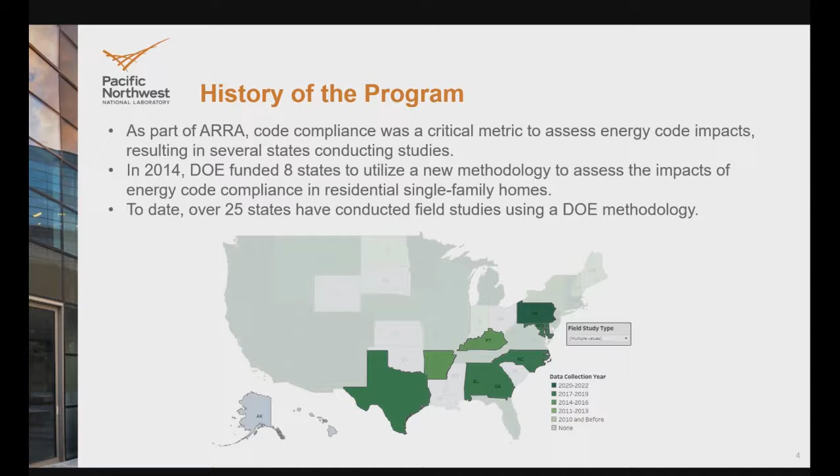And then here are the 8 states that were initially funded as part of that 2014 funding opportunity announcement. That was the 3-part pilot series that really generated additional interest in continuing on with field studies and using them for a number of reasons.

So if you're a state or a local jurisdiction, you may be asking, why should I conduct a field study, whether it be residential, multifamily, or commercial? There are a number of benefits for doing that.

One being just to get a sense of how homes, multifamily buildings, and commercial facilities are being constructed across states. From the single family side of things, which I'll primarily be talking about today, what types of foundations are primarily installed in states across the US, or in your specific state?

How well are homes being tightened up? And if they are being tightened up and have relatively low air leakage rates, do they have mechanical ventilation, and what does that mechanical ventilation look like?

There are a lot of benefits, both from a code compliance standpoint, but also from a utility standpoint in terms of developing programs and really just getting a better understanding of what's going on within a state or a particular jurisdiction. From an energy code standpoint, really the impetus of these studies was to assess rates of non-compliance.

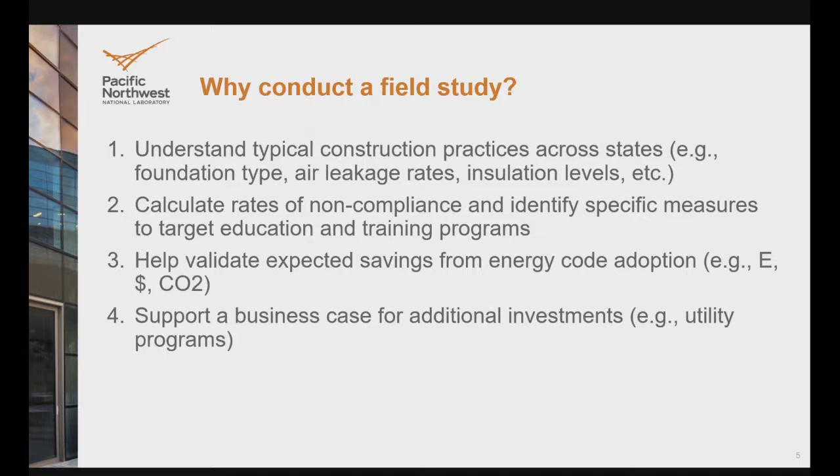And then the last big benefit is utilities are certainly interested in energy code compliance programs and using that to potentially claim savings through an energy code support program. So this can potentially help drive additional investment from utilities in terms of energy code implementation.

So a little bit about the methodology. I won't get too in the weeds here, but I referenced the key measures as being a really important aspect of these studies, and that's because those are really the basis for the methodology, the basis for the potential energy savings that are generated. There were 8 key measures identified in the residential energy code as being the high impact measures, having the biggest impact on energy use in a home.

The list is here: envelope insulation levels, as well as how well that insulation is installed. Field teams looked at both of those aspects, and that determined whether or not that specific measure was being complied with or not. Window efficiency, both U factor and solar heat gain coefficients, envelope air tightness, duct tightness, and high efficacy lighting.

And so the methodology requires that 63 sets of each of these measures be collected. So for one complete data set, it is all 8 of these measures, and we need 63 complete data sets for those, for us to do an analysis at the state level, and for the results from that analysis to be statistically significant and representative of compliance rates across the state.

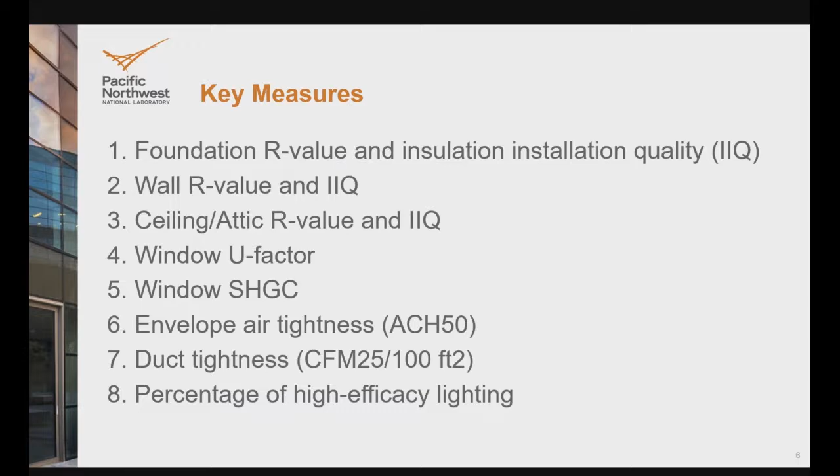Before I jump into the new tool that's been developed, I wanted to provide some initial results from that pilot study, which was really just a proof of concept of this new methodology that DOE and PNNL developed to assess energy code compliance in residential single-family buildings.

There was a 3-phased approach. Phase 1 was the baseline study. Phase 2 was the education and training program. And phase 3 was the post-program assessment to determine whether or not we moved the needle, or the field teams moved the needle, in terms of compliance.

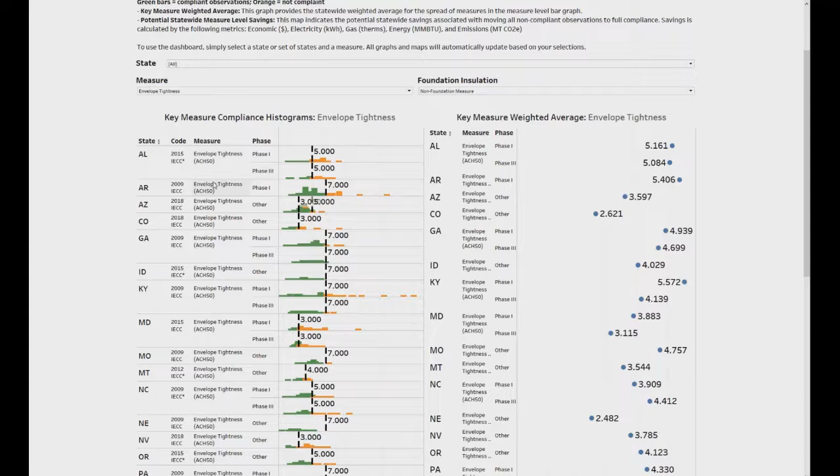The green bars indicate that those observations are compliant, and orange indicates non-compliance, so anything to the left of the line is compliant and anything to the right is non-compliant. You can see the breakdown of data for each state and for each measure. On the right, you can see the weighted average air changes per hour for each state based on the data that was collected. You can see that Alabama made a slight improvement, at least on average, from phase 1 to phase 3 in terms of envelope tightness.

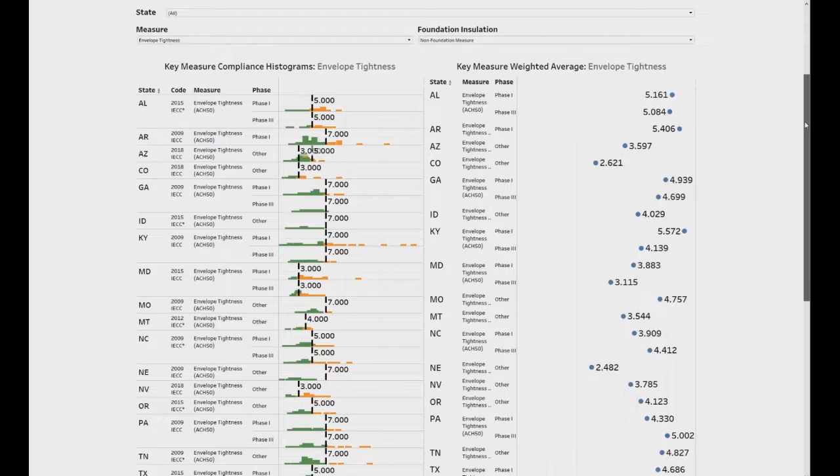Maybe a better example might be Maryland. They were on the 2015 IECC at the time the data was collected, which required 3 air changes per hour. So they went from a 3.8 average to pretty close to the code requirement on average. They made a pretty big jump there.

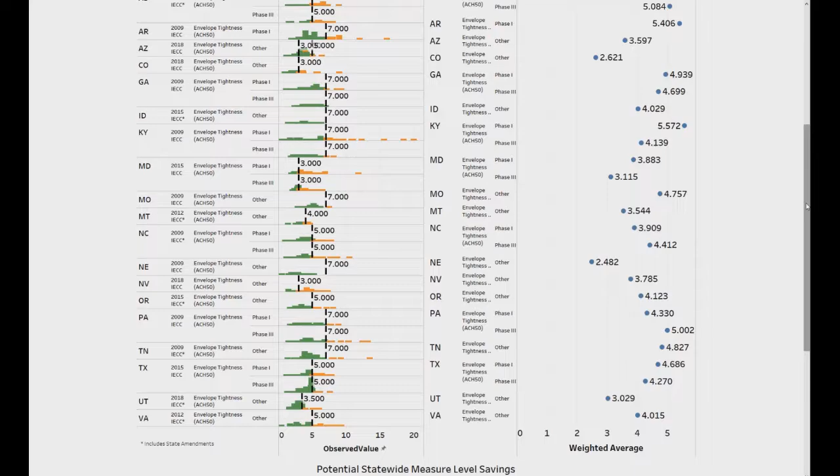Scrolling down, you can look at potential savings by measure in each state. This is economic savings, so dollar savings at the state level, but we also have this information for electricity savings, gas savings, emissions, and energy in MMBTUs. You can filter through those, and you can look at it at a per-home level.

You can also compare states. So if you wanted to look at Southwest states, which are also ones where field studies were recently conducted and finished up - Arizona, Colorado, Nevada, and Utah - you can just compare those states to see how results compare. You can look at different measures.

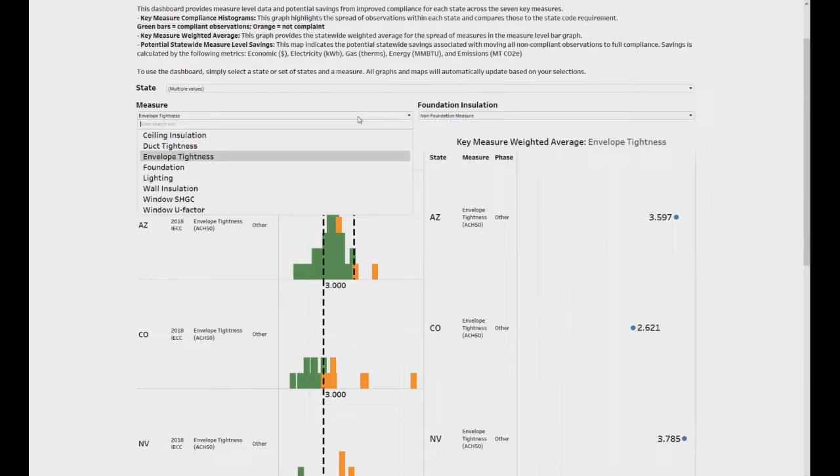So ceiling insulation, for instance - all of the insulation values we provide in U factors. We did collect the R value data, but the reason we provided U factors is because insulation measures require a combination of R value as well as how well that insulation was installed, and that's what determines the U factor. We model these U factors and then compare that against the code required U factor.

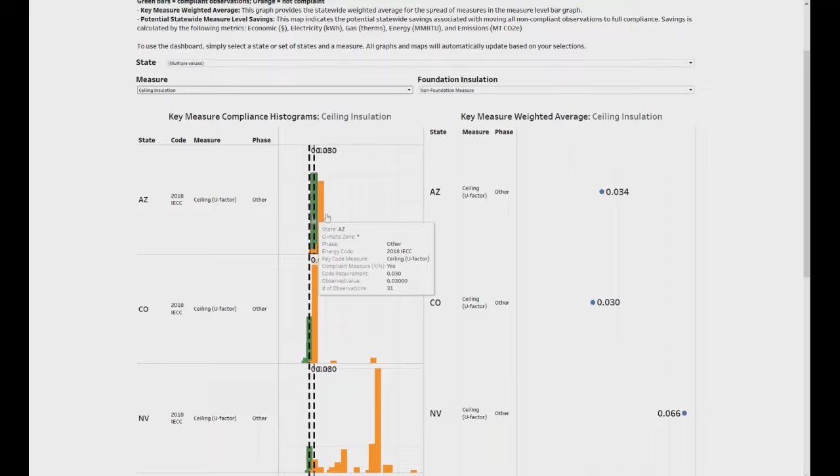Some states have multiple climate zones, so there are multiple requirements, but the colors still represent whether or not the measure or observation was compliant. There's a lot of data on this tab in particular. I think this is a pretty important tab and kind of the crux of the study - it's foundational to it, given that it's a deep dive into the key measures that generate savings for everything else.

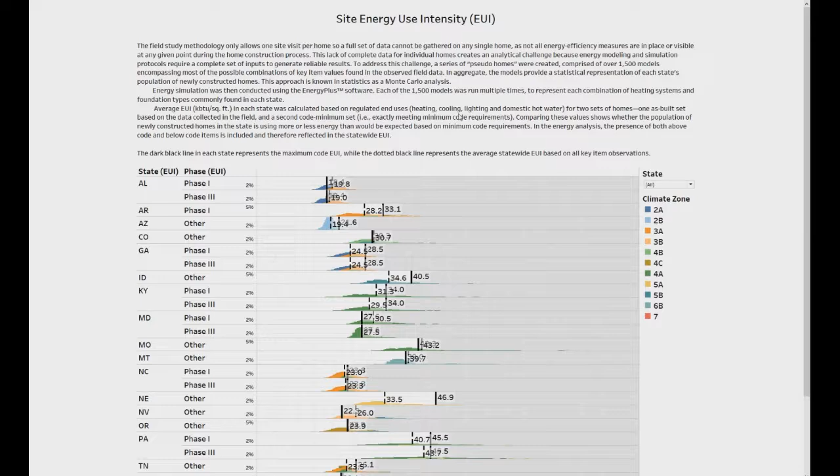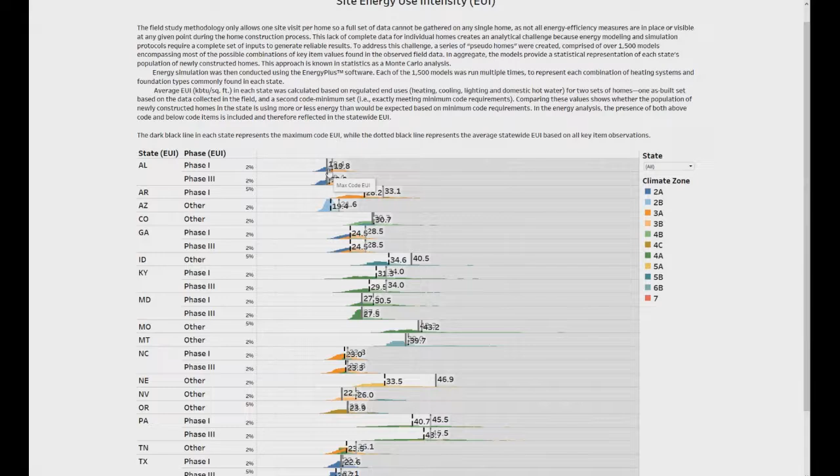Some other tabs - I think I'm running low on time, so I'll try to breeze through these quickly. Average energy use intensity, through a pretty sophisticated modeling approach. We'll just look at one state to make it easy - let's look at Georgia. The dark line is the maximum code EUI, or the EUI required if a home was meeting the prescriptive requirements of the energy code, and the dotted line is the average observed EUI.

So out of all the data that was collected, it provides the average across the state.

We also looked at installation quality, which I referenced. This is a high level across all states. Grade 1 insulation is typically installed per manufacturer's instructions and doesn't have as many voids or gaps, really providing the thermal properties intended from that insulation. Grades 2 or 3 have a lot more gaps and certainly degrade the effectiveness of that insulation. So insulation quality was a big area, and really across all states has been a big area for potential improvement.

But certainly some states more than others, and some measures more than others. Ceiling insulation was typically fairly well installed. And then I'll just reference the last 3 tabs here.

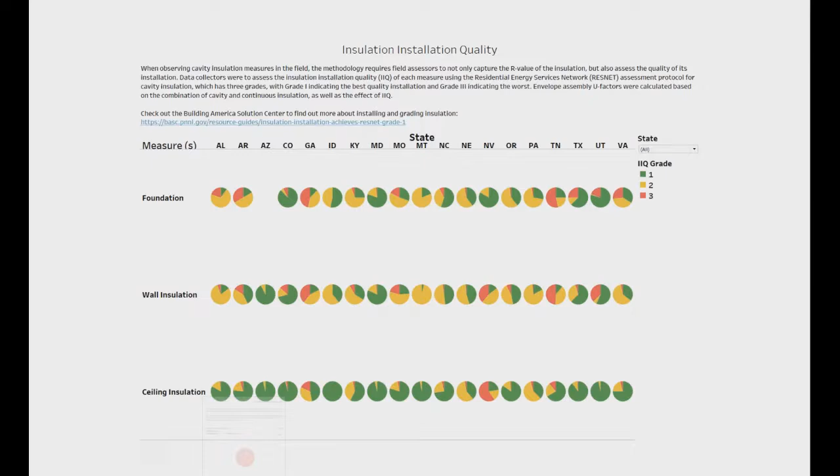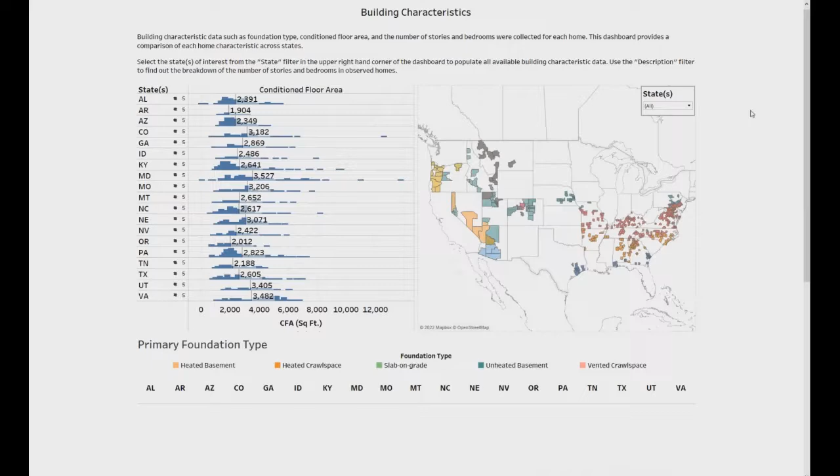So we collected measures on HVAC compliance as well as efficiency levels, so there's data there, plus lots of other compliance measures. The field study and measure analysis is really based on those 8 key measures, but the actual data collection spreadsheet requires that teams collect all sorts of additional compliance measures, and that's all included as well. And then just some general building characteristic information: conditioned floor area, foundation type, number of bedrooms, number of stories.

And so I will end things there. We'll provide a link to the online dashboard at the end of the set of presentations, and certainly would encourage you to take a look, and hopefully you can use this as a resource when you're developing training programs and doing other things. And so I'm going to switch gears and introduce our next speaker.

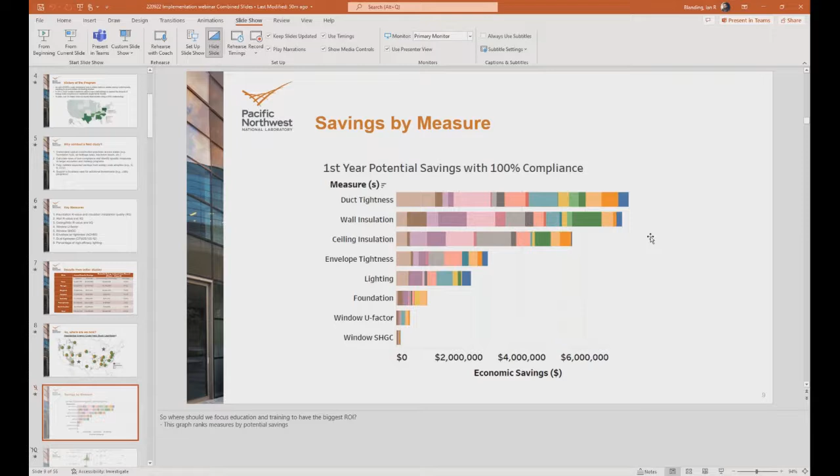So Rob Vieira is the Director of Buildings Research at FSEC. One of the key questions we get, in addition to energy code compliance, through the Department of Energy, is which compliance method are builders or designers choosing to comply with the energy code, whether it's prescriptive, performance, or UA trade-off. So Rob and his team set out to understand and answer some of those questions. They also took it a step further to try to understand whether or not the compliance path you choose impacts overall energy use after the home is built, so impacts operational energy use.

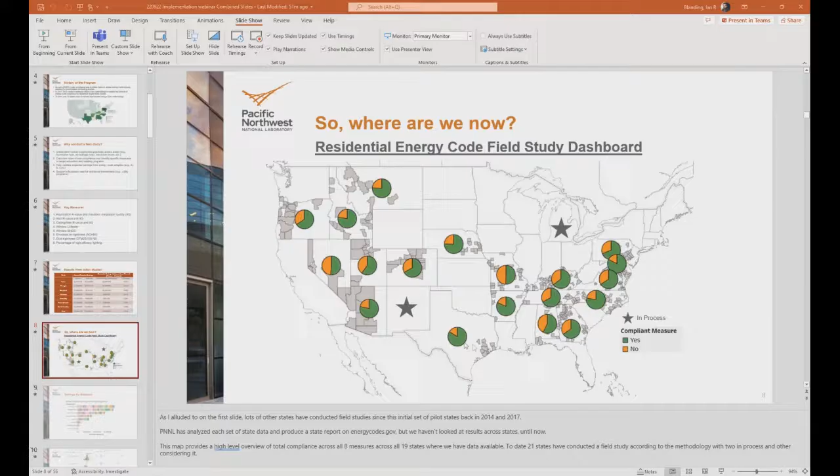And so I will turn things over to Rob at this point, and then we'll learn about the study that him and his team have conducted. So Rob, if you're out there, if you want to take control, and looking forward to hearing your presentation.

Great. Thank you, Ian. Appreciate it.

So as Ian mentioned, we have a project from the Department of Energy. And are you seeing the slide? Yep, all yeah, good, we can see it. I just want to make sure. So we have this project.

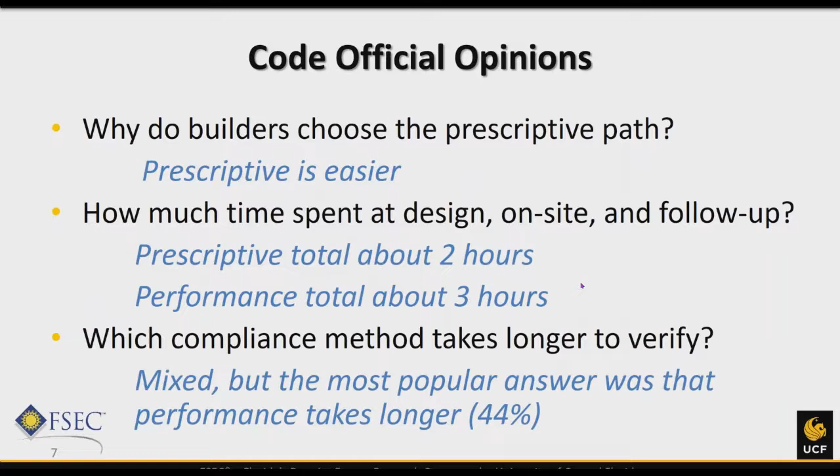We also asked in terms of consistency, what are you having? And in this case, we defined what we called good as meeting all required targets, with fewer errors. Variable was defined as builders are a bit inconsistent, sometimes important items are missed. Or poor, which is defined as builders' compliance with energy code is often incorrect.

And we saw that varied depending on whether you were in a jurisdiction that did mainly performance or prescriptive. Basically what it came up to was not a huge difference here. We had about 8% doing poor for performance, and those doing prescriptive, 9% - no real difference there. The group in the middle that's mixed, we only had 5 respondents in that group because, as we said, that's a pretty small group.

So that gives you sort of an idea - not huge differences along the way, just a little bit more time to do the performance according to the building officials than the prescriptive.

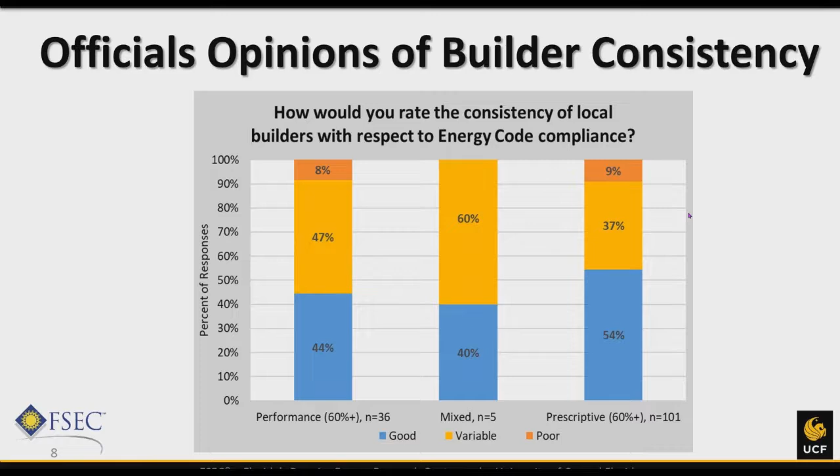So we'll jump into the utility bill comparison, which we did in 2 locations. Both are in climate zone 5 - that's Fort Collins, Colorado, and Iowa.

Because of requirements of the state in Colorado, we had to bin homes into groups of 15 or more. In Iowa, 5 or more. So even when you start with a fairly decent set of data and houses drop out for one reason or another, when you end up doing binning, they end up reducing the ability to do statistical significance - because instead of having 15 or 5 data points, you have 1. And when you bin into 15 or more, keep in mind, if you've got 25 homes of some certain group, that's basically becomes just 1 bin. So it's even more so than that.

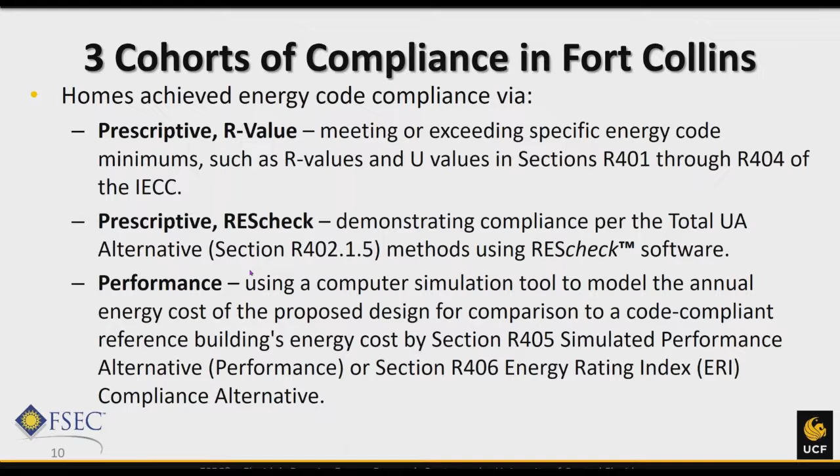In Fort Collins, we had a request to break up the prescriptive into the R-value and the REScheck method. And then we did performance, which was R405 in Fort Collins. So those were the 3 methodologies we looked at there.

We further broke it up depending on whether it was attached or detached. And then we looked at the group of houses that were built under the 2015 code. We knew the date the permits changed where they started using the 2018 code.

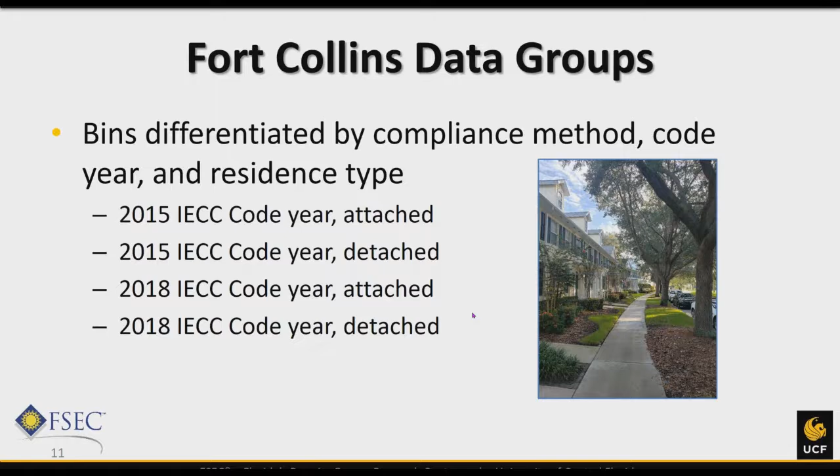And so we portioned those out separately. At the time we started making the request, we wanted to get actually 15 months of billing data, which somewhat limited the 2018 data. We couldn't get very new homes because we wanted to make sure any home we put in this bin wasn't going to drop out, or a few of those dropouts would make our bins disappear altogether. So we had to be a little bit conservative in asking for that data. So the 2018 group isn't as large as the 2015 group in Fort Collins.

We ended up with 731 homes in the end that we got data on, and the data we got was in 39 different bins. As you can see, when we ended up getting prescriptive R-value, that was the smallest group. We only got one attached bin of 2015 and 3 detached. We didn't get any prescriptive R-value for code year 2018.

Performance, and prescriptive REScheck were fairly similar. We got 16 total performance and 19 total REScheck. Again with more detached - code year 2015 was our largest group.

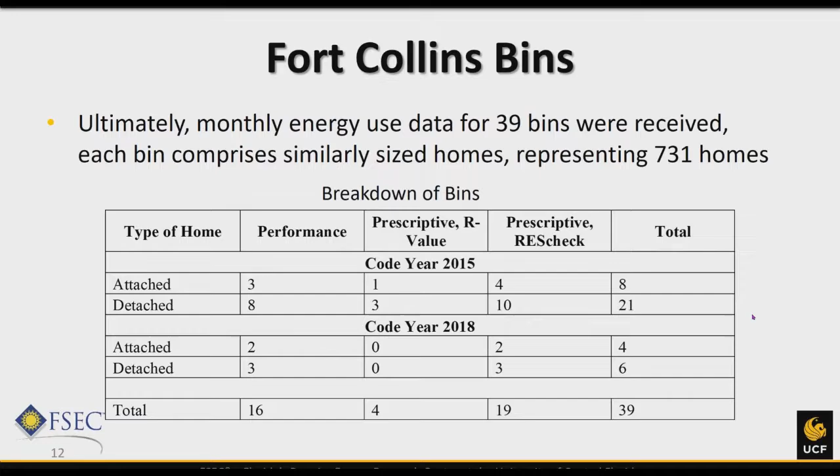Good news is the utilities cooperated very nicely with us in Fort Collins for the Fort Collins data. Instead of getting billing data - if any of you have done this, you get billing data and it's grouped together - some of the folks may have been billed on, say, March the 3rd for the March billing, somebody else March 30th. Well, the person billed March 30th has March weather, the person March 3rd largely has February weather. One may have 26 days, one may have 30 days in their billing cycle. You don't know the way folks are read.

If all you do is get billing data and you don't have the billing dates or anything else, you wouldn't have some of the same weather and other factors if it was grouped together. But they normalized by calendar month and the number of days that the billing was. So we got good quality data, we believe, the way they did things as we had asked, which was a great help. And they even provided minimums and maximums for each bin for each month and standard deviation. And then we used, of course, the monthly average usage, which is what you'll see in this report largely.

Home size wise, even though sometimes it's totally different builders doing totally different projects, totally different sizes, that wasn't so much the case.

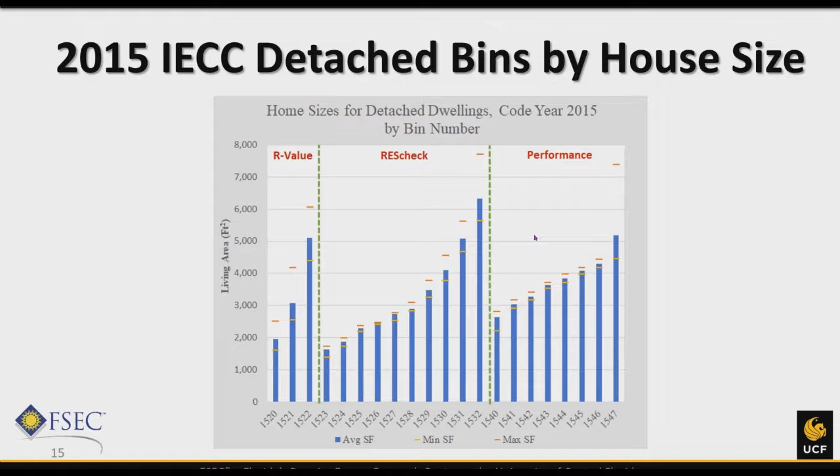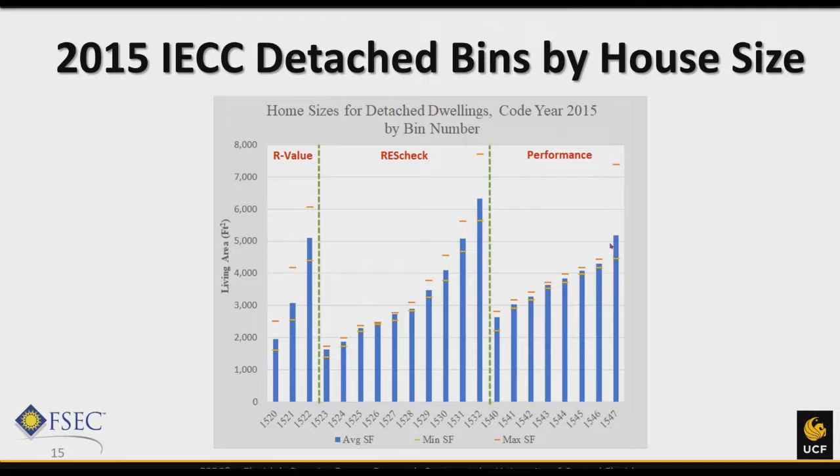And then this is the same information for detached dwellings. You can see again, we got a lot of similar groups, and we had enough houses that we didn't have a large range of square footage within the bins, until you get to the largest bins in each group, which are averaging 5,000 square feet or more.

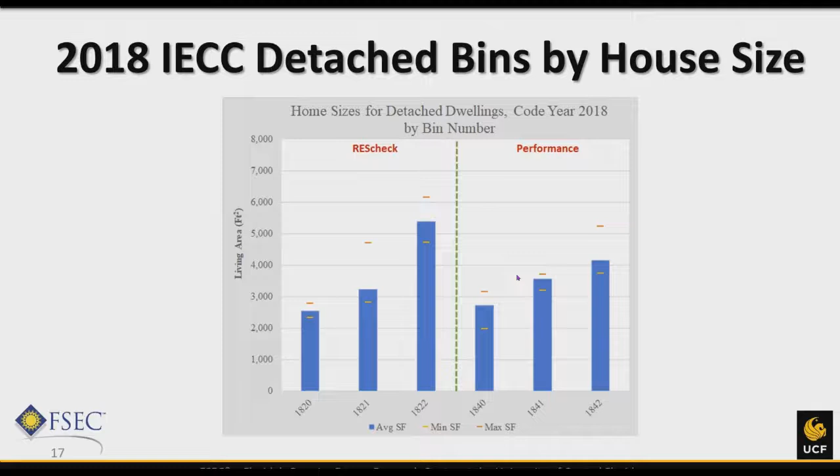We went back and learned that indeed, this particular bin's houses were all built by a particular builder who uses electric resistance water heating in these attached projects, and then uses that everywhere. Other builders use gas, so we followed and were able to figure out how many electric resistance versus gas water heating was in each bin.

The other thing, sometimes data dropped out for something like gas during the summer, because one of the rules in Colorado is if you're going to provide the data to somebody in these 15 bins, no one house can be more than 15%. We're not always sure why things dropped out; we're not told that reason, but chances are during the summer, where use is kind of low relative to winter, it'd be easy for one house in the bin to have some extra gas use. They're grilling out for a party every night with natural gas or something else. So one house gets more than 15% of that total energy in that bin for that month, then we don't get any data, which is what I suspect happened in a few cases where we didn't get summer data.

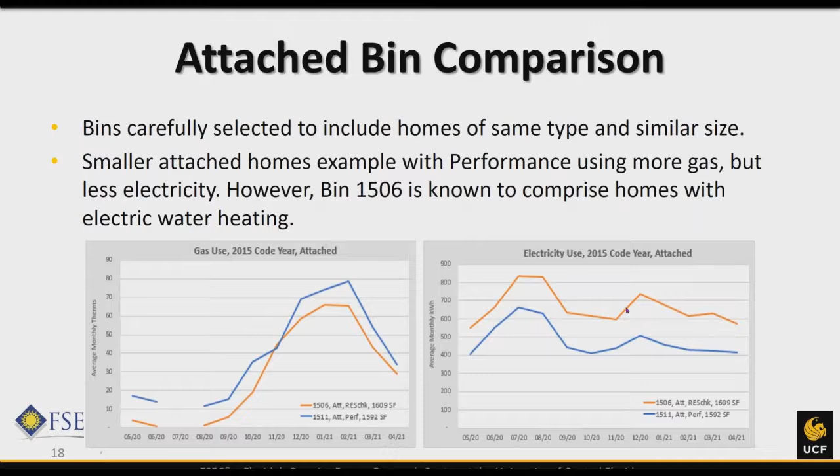Electricity use, you see this follows pretty closely. Again, these houses had electric resistance — the ones on top had electric resistance water heating. And so they're about 150 to 200 kilowatt hours more in that case. This was comparing REScheck homes versus performance, but as I indicate, a little different water heating system.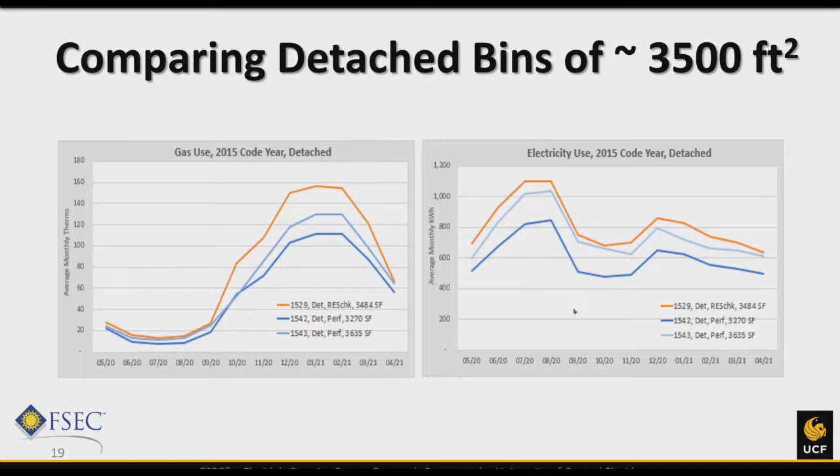If you look at 5,000 square foot houses where we had a bin in R value, res check, and performance, you see they tracked very closely for gas, no real difference there. And when you go look at electricity, you see they're tracking fairly close, although a little bit more.

In this case, the res check was a little bit lower than the performance, which is in blue, or the R value, which is in green.

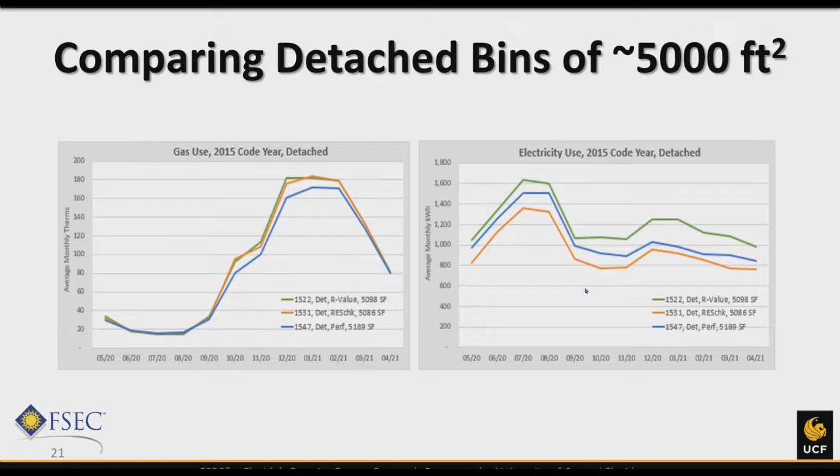We did this, so what's it come out, and then that just shows you sort of the bin by bin where we see things very visually. Not so visually is when you do a linear regression.

So when we did this linear regression, where you see green or red, these are basically representing the same thing. It means there was some significant difference. Green, you would read this, that the attached

2015 homes using res check showed a significant statistical benefit. In other words, significantly less gas energy than performance.

Got reversed some when you got over here. We say marginally significantly more. The statistic wasn't as strong when we say marginally. So you see some variation in this.

In general, when you get to the detached, the performance did a little bit better if there was a difference. There's a lot of white boxes. White boxes mean there was no statistical significance.

Also point out, in addition to the water heating thing, which we were able to put in a variable for, there was a little bit of unknown of for certain how many homes.

Homes were known to have a problem where they added electrical tape to the condensate line, not condenser, on the condensate line that was in the attic.

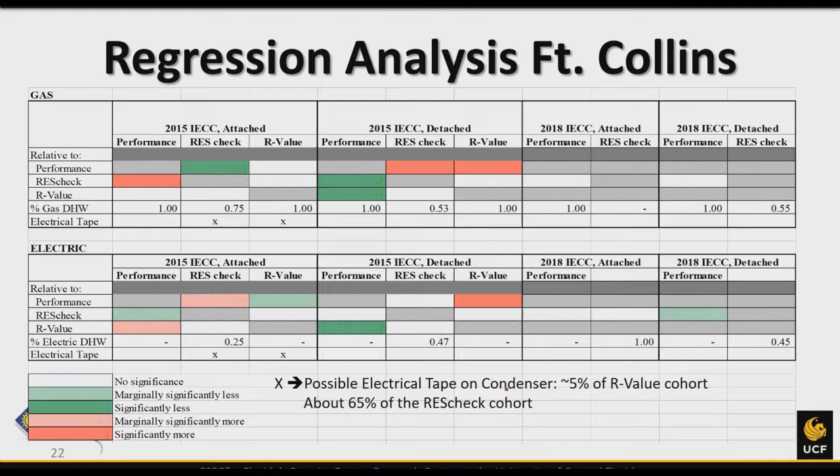It was about 5% of the R value cohort and about 65% of the res check cohort. So there's electrical tape on the condensate line because they put the air handlers in the attic, which is not a good place to put air handlers.

House size was significant and always showed up statistically significant, isn't surprising there, and went into each of the models.

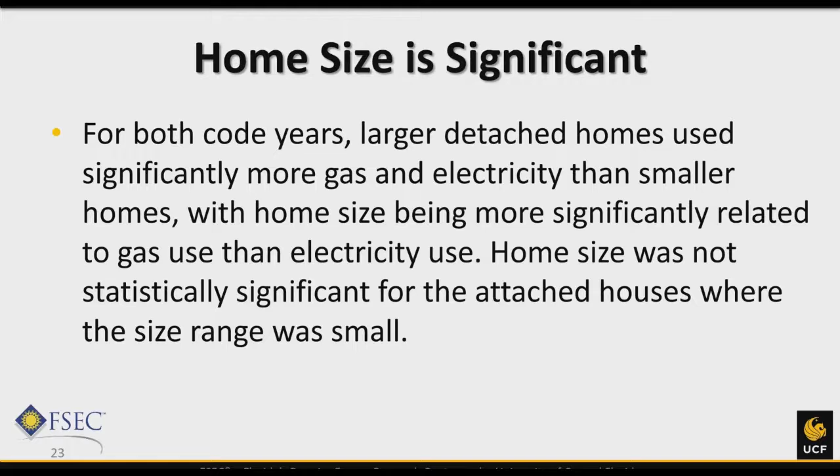When we look at the mean home size for a group of data where we actually have some significant differences, how much does it really make if we were to use our model? Keep in mind there's a fair amount of error in these models, so this isn't like a perfect thing.

We could see that, and this is assuming, because we plug this into the model, that all the house, the house would be 100% gas, have gas heat, gas water heating.

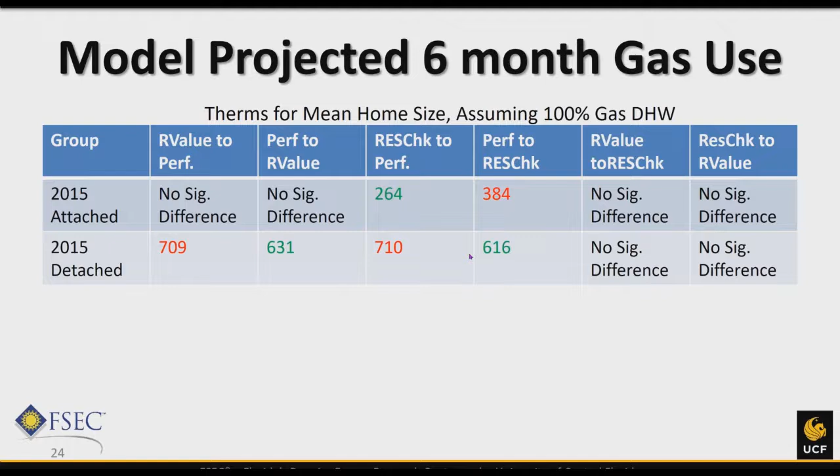We see about a little over 120 therms less for the res check than the performance on the gas side, and about 100 therms more on the detached side, so not consistent.

Okay, when we go look at the 2018, we actually had a case here in 2018 where we actually showed a difference. In the gas use, we didn't show any significant difference.

Again, you see a lot of cases without significant differences. We do see a case up here. This also had the condensate line tape, and it was much higher

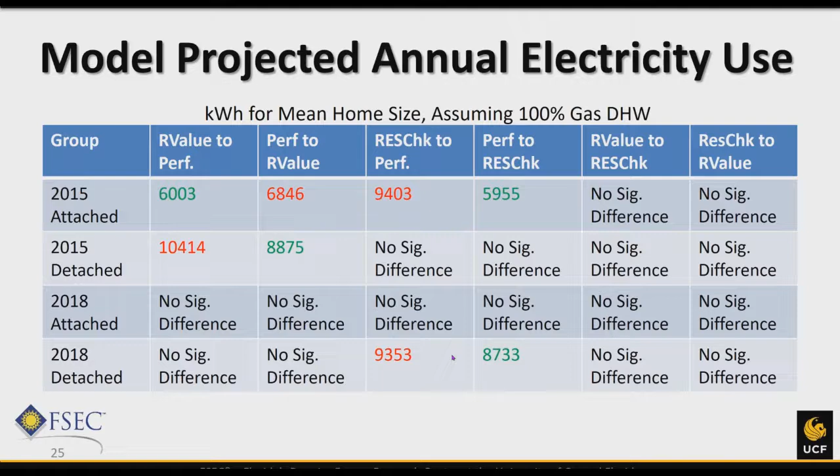res check than performance. Again, performance doing a little bit better every time we see the detached houses, whether it's versus R value or versus res check, if there was a statistically significant difference.

So what's the bottom line from Fort Collins? There's unlikely a huge prevalent difference in energy use. If it was huge and it was prevalent, we'd see it more consistently across the board. However, with the way the bins come out and all, we can't conclude that the methodologies are equal, right?

We are seeing a couple of differences. We are seeing some differences some of the time.

The utility bill data is a little different. The utility bill data, let me just check something here.

Utility bill data in Iowa is broken into 3 groups: performance, prescriptive, and a third group which was HERS plus prescriptive, where homes met compliance using U-factor alternative or UA trade-off methods, and also included a home energy rating. The rating didn't have to hit a particular target, but it was included as part of it. We had more detailed data on the HERS plus and performance groups than on the prescriptive group in terms of house characteristics.

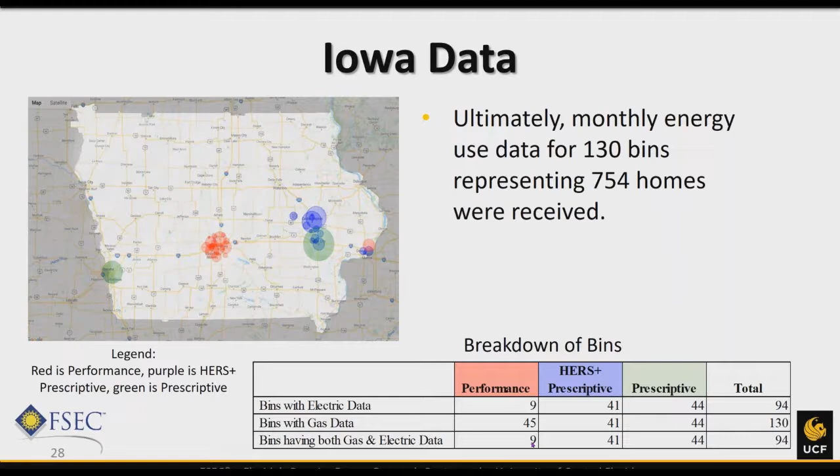It was only in certain areas that we got data. In this case, we got 130 bins, smaller bins, and 750 homes were received. Bins having both gas and electric under the performance category were unfortunately kind of small, with just 9, but we got bigger groups in the others.

Looking at house characteristics, average house size wasn't too greatly different between groups, though the HERS plus homes tended to be larger than the others.

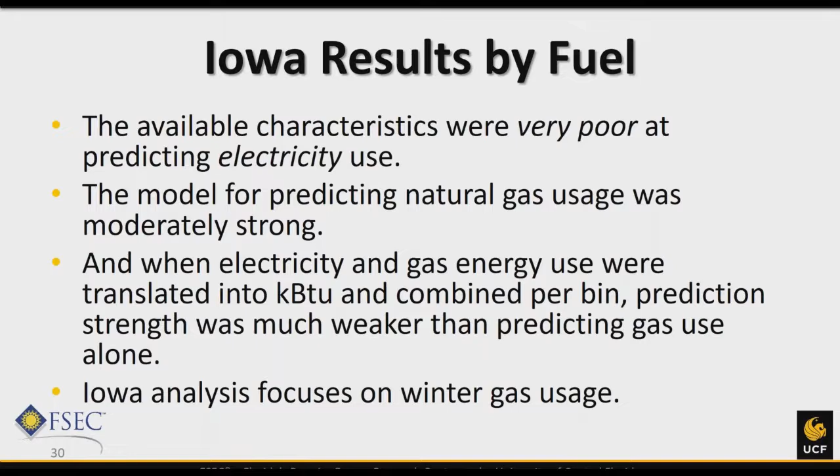Some results came from regressions predicting energy use based on the characteristics we had. It was very poor at predicting electric use. We did have a model that was reasonably strong for predicting natural gas use, but trying to combine gas and electric just made things worse than having gas use alone. So we tended to focus on gas use across the whole data set.

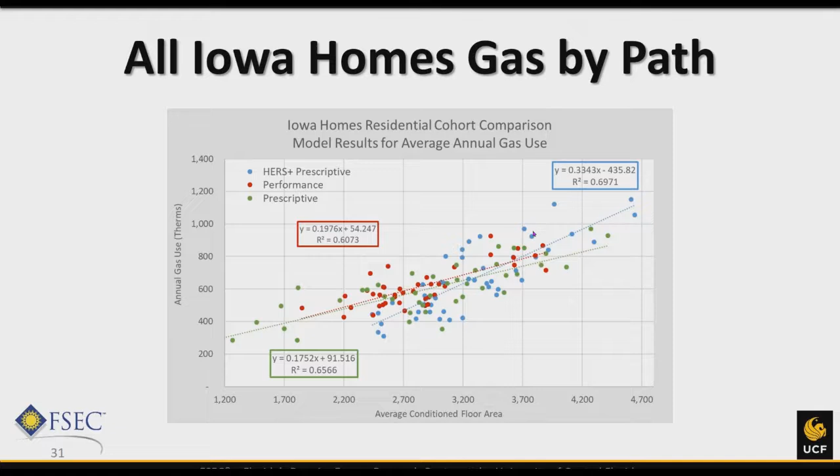You can see scatter plots here. When we ran regression models, we did not find that the type of compliance was significant—in other words, how homes complied did not show up as significant. But when we broke up the data to look separately at homes greater than 3,000 square feet and homes under 3,000 square feet, we did find things started to show up as significant.

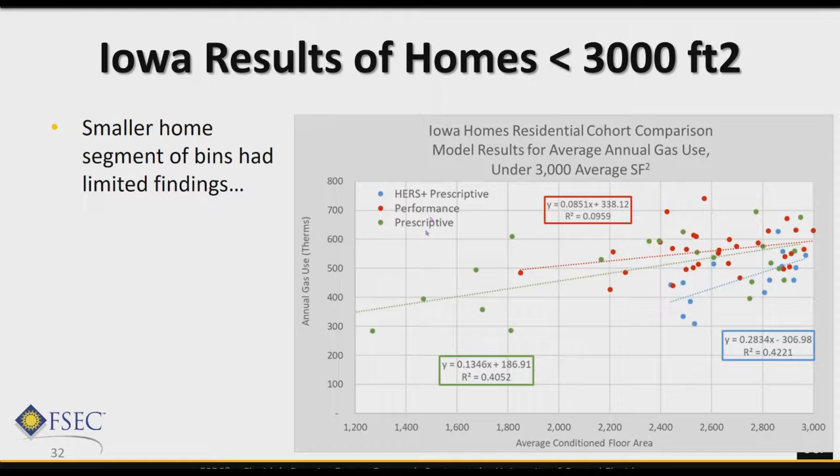We'll point out that the performance homes had a great deal of scatter—this is a terrible fit if you're going to use a linear regression to represent this data. It's much more all over the board compared to the quasi-decent fits seen in the HERS plus and prescriptive groups.

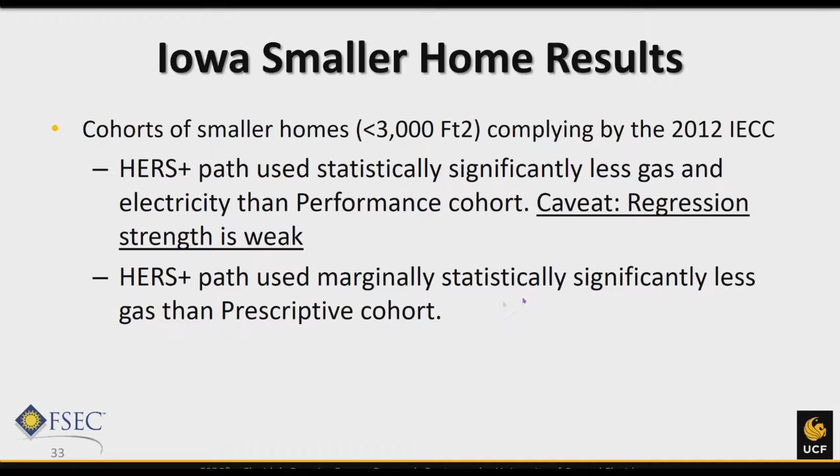What we found was that the HERS plus path used statistically significantly less gas and electricity than the performance cohort, though we'll point out that the performance cohort model is kind of weak. The HERS plus path also used marginally, statistically significantly less gas than the prescriptive cohort—meaning it wasn't quite as high a coefficient.

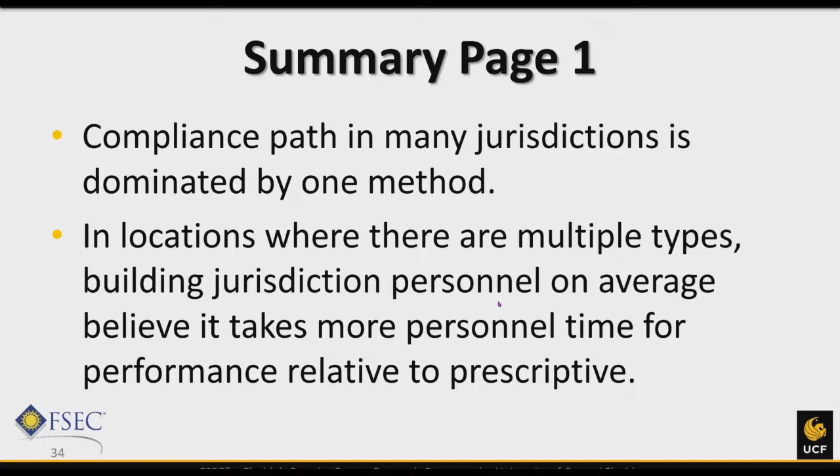In summary, the compliance path in many jurisdictions is dominated by one method, as we saw. In locations with multiple types, building jurisdiction personnel on average believe performance takes a little more personnel time relative to prescriptive. When we looked at the utility data in climate zone 5 regions, the two areas studied, it was not consistently significant—the compliance path was not consistently significant in determining occupants' energy use.

In other words, people want to know which method is always better. There isn't going to be an always-better answer out of this. In some cases, there were significant differences.

To review: in Iowa, when we parsed the data to under 3,000 square feet, the HERS plus path homes did better than the other two groups. In Fort Collins, looking at just detached homes complying by performance methods, they tended to use both less gas and electricity than homes complying with REScheck or the R-value method, when there was a statistical difference—though in some cases there wasn't. The attached homes, however, did not follow these results.

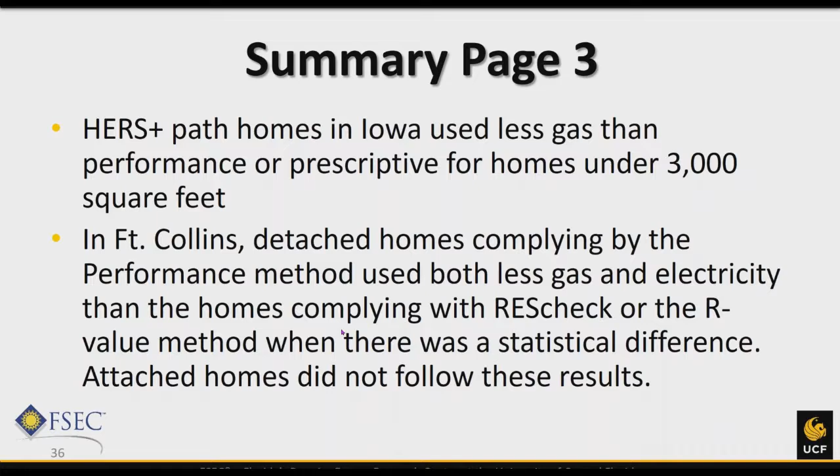So I'd like to wrap up with future good studies to do. It's difficult to find situations where both prescriptive and performance are used in some prevalence—you'd like to find different climate zones where that's happening, with very large samples required due to binning. If you could get utility cooperation where they did the work in-house and just released the results, that might be a way to avoid binning issues. One issue is that usually a builder is doing all the same compliance method.

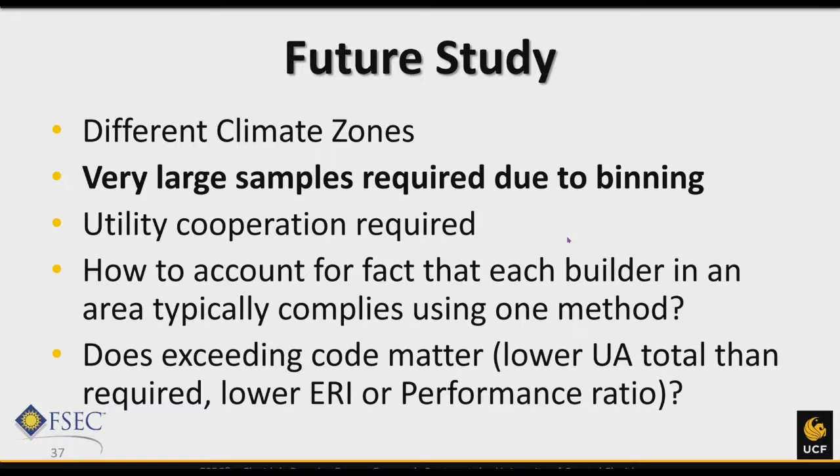How do you account for that? Take that out of it. And does exceeding the code matter?

I want to tell you there's some reports. So when you get this, there's some reports we have on this. We do not have the report yet on the utility data. And I want to thank Philip Fairey, who's principal investigator, Karen Fenaughty, who has done the lion's share of the work you're seeing here today, and my colleague Jeff Sonne on our team, and Jerica Stacy, Dave Walls, and Chris Stenger from our ICC part of the team.